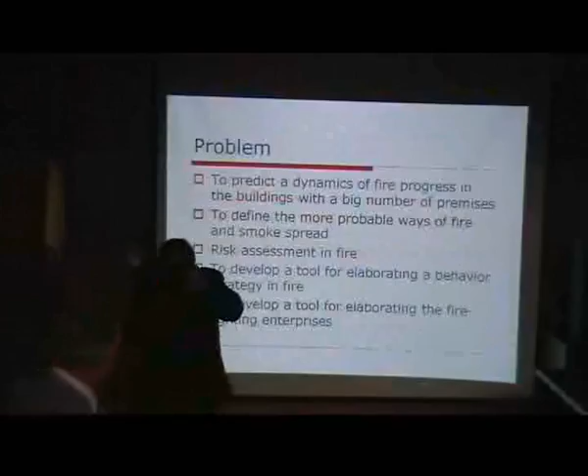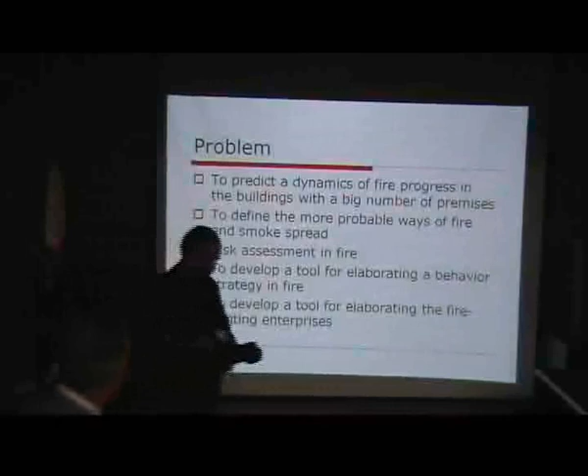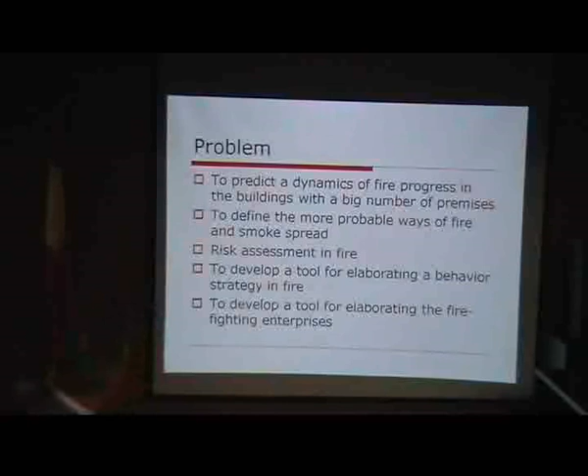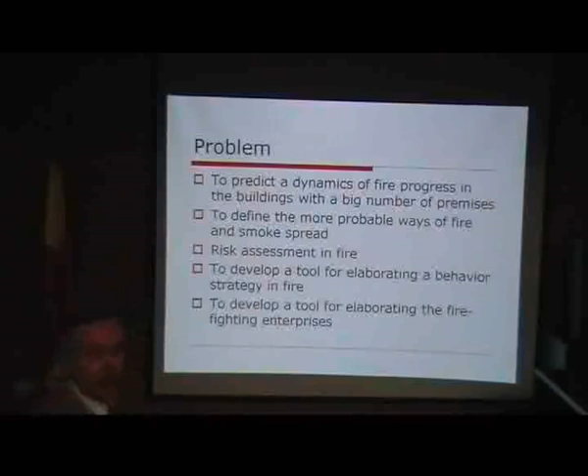My talk is about a thermal hydraulic model of building fire. The problem is to predict dynamics of fire propagation in buildings with a large number of premises, to define the more probable ways of fire and smoke spread in the building, and the risk assessment in fire, and to develop a tool for elaborating behavior strategy in fire and for firefighting enterprises. The goal of our work is to develop a tool for engineers and building designers to create a model which allows calculating different situations in a building during fire.

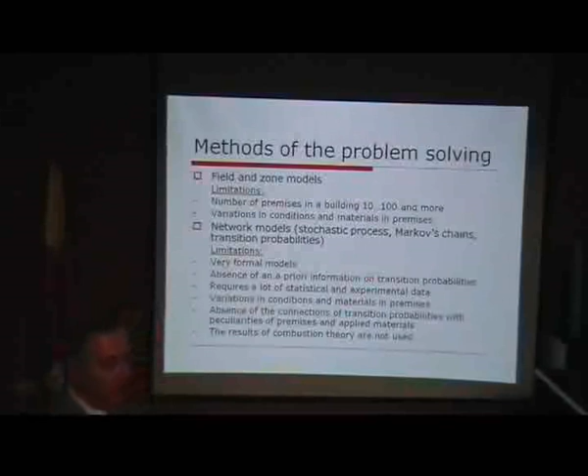There are a few methods for simulation of fire in premises, buildings, and rooms. I won't discuss the very complex methods, for example large eddy simulation methods and CFD methods. There are also field and zone models, but these models have big limitations because they are very complex for calculation of a large number of premises, and cannot handle big variations in material conditions and environmental conditions for different fire spreading situations in a building.

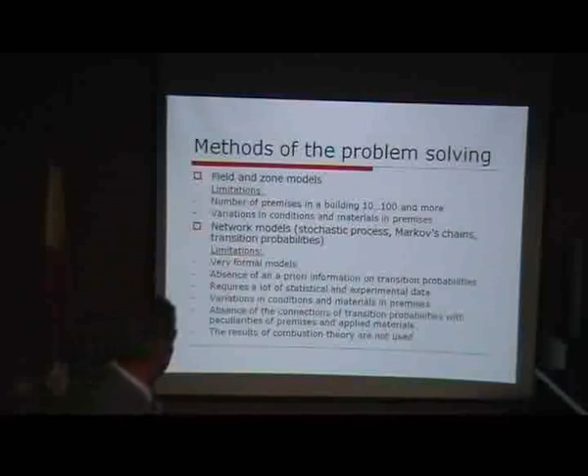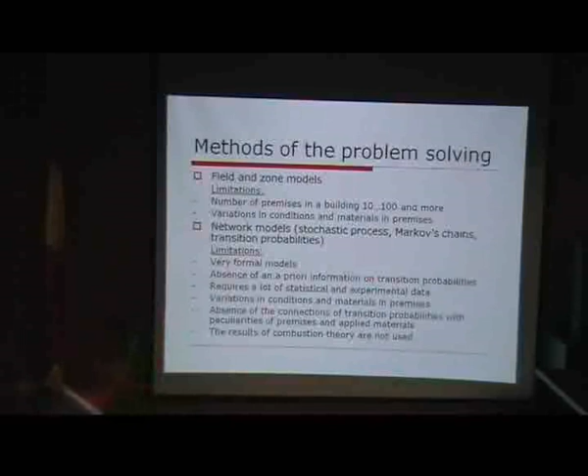The next type is network models. These are stochastic models in which the building is considered as a Markov chain, introducing transition probabilities through formal models. There is no a priori information about transition probabilities, and a lot of statistical and experimental data is necessary for calculation of such models. These models don't use results of combustion theory, so they are more formal and cannot be used without a large volume of experimental data.

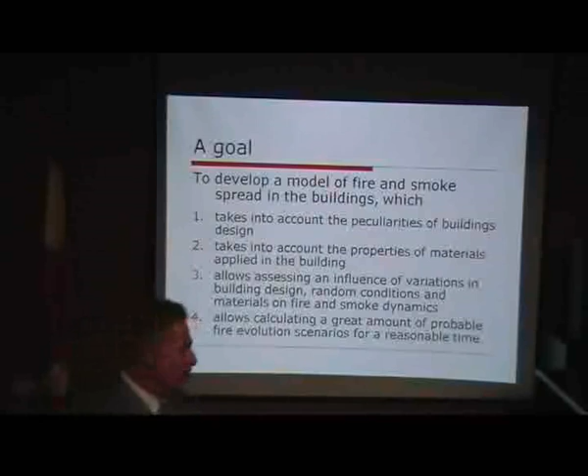Our goal is to develop a model of fire and smoke spread in buildings which takes into account the peculiarities of the building's design, the properties of materials applied in the building, and allows assessing the influence of variation in building design and random conditions. For example, you can open or close windows and doors, switch an air conditioner on or off, or environmental conditions can change, such as the direction of the wind. It is necessary to calculate different scenarios to find the more probable ways for fire to spread in the building.

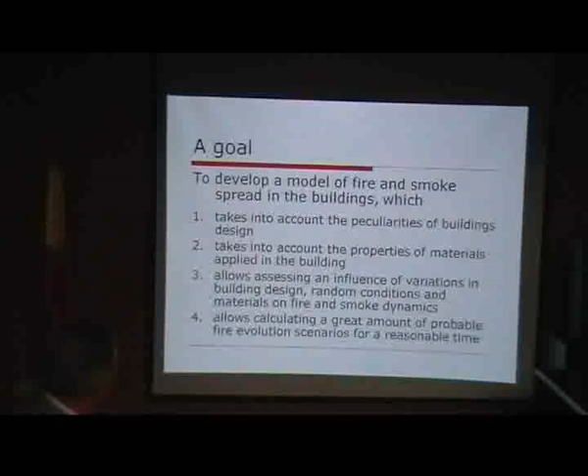But we consider not only fire, but also the spread of smoke and combustion pollutants in fire. Because of this, we consider two kinds of models.

The first one is a hydraulic model of the building. This model considers a building — for example, this picture shows a realistic building, one floor of our faculty. We consider a building without fire as a graph, where the vertices of the graph are the premises.

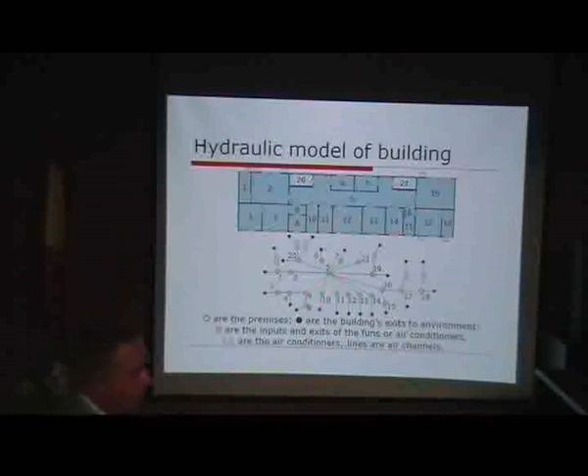The branches of the graph are channels for conduction of airflow in the building, and black circles are exits to the environment. In the scheme of the building, we consider only doors and windows as channels for air flow within the building and to the outside. Each channel in the scheme is characterized by some parameters, which are the usual hydraulic parameters of the system, allowing us to calculate the flow of air in the building without fire.

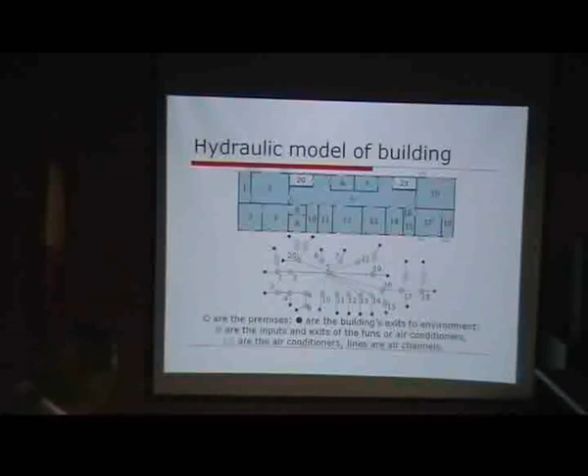This slide shows a model of air flow in the building. This flow is described by a few equations. The external equation is connected with the aerodynamic pressure of the air around the building, hydrostatic pressure, and pressure far from the building. The hydraulic pressure drop between premises, or vertices in the graph, is described by an expression which takes into account the hydraulic drop of pressure between premises.

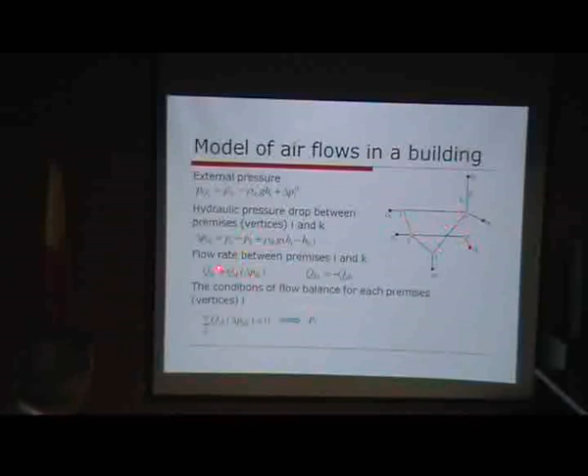One of the premises in the graph is the exit and entrance of the air conditioner, and the pressure drop of the air conditioner is considered as a constant parameter, which can be switched on or off depending on the situation we calculate. To calculate the pressures in different premises or vertices of the graph, we consider a flow balance condition, which allows calculation of pressure in each premises and the flow rate of air between premises, without fire.

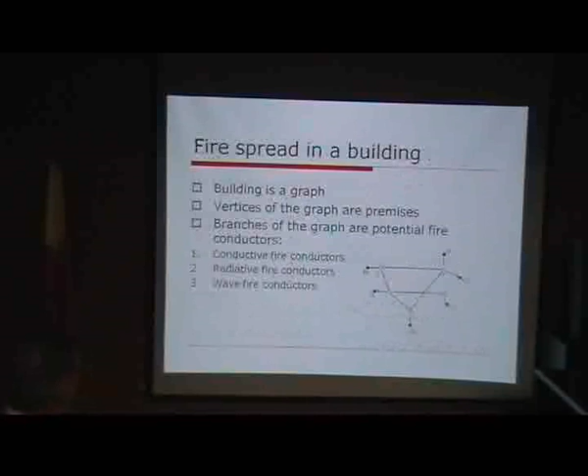The second step is calculation. Of course, one of the premises has sources — for example, in some premises there is fire.